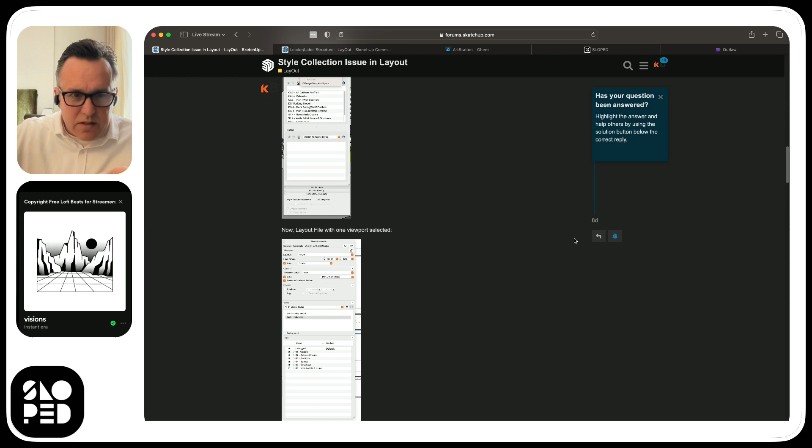I had an issue, an interesting thing I wanted to make clear. This is for Mac users—I don't believe it's on PC as well, but let's take a look. Let me explain it real quick.

You have the ability in SketchUp to set custom locations for these types of assets. Most people might have a custom location for styles, materials, components, and maybe texture images. It's kind of fun to have those in another location if you're managing big libraries, instead of diving down deep into the system files where these are located. So they give you the option in SketchUp to set these.

For me, I had a problem because when you set that, you can see your custom folder in SketchUp, but when you go to Layout on the Mac, you cannot see that custom location for some reason. It took a lot of research and discovery, and we thought it might be because the folder location was on iCloud, but that didn't turn out to be true. I had to ask some more questions. Colin came in.

He said this: I haven't found an answer yet. Layout doesn't have a preference setting for saying where styles are. Otherwise, you could have pointed that to your custom folder location.

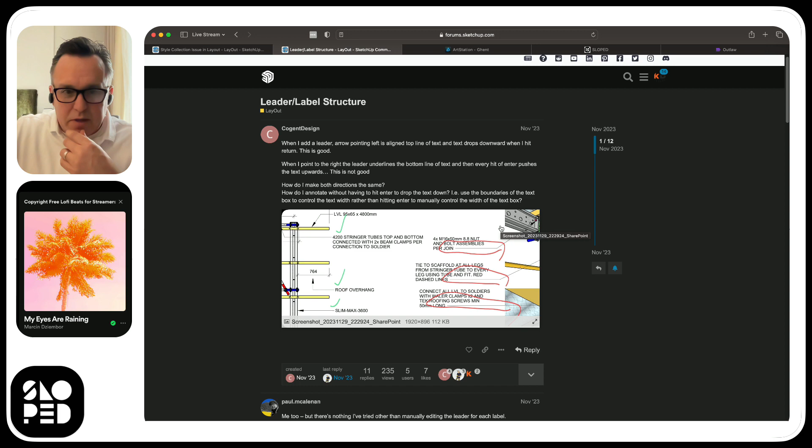This came up the last time I streamed, about a month ago, and we talked about this little thing in layout with the way the leader lines justify depending on which direction you take the arrow. And this is the little box, and I thought that Paul had actually put these dots in here, but he did not. These are default dots that are available, so let's see if I can get this.

We're going to go to SketchUp and Layout, and go to this elevation, and I'll show you. So this is the leader tool. If I go up and to the right, and then I type a bunch of... okay, get rid of that, and now we will...

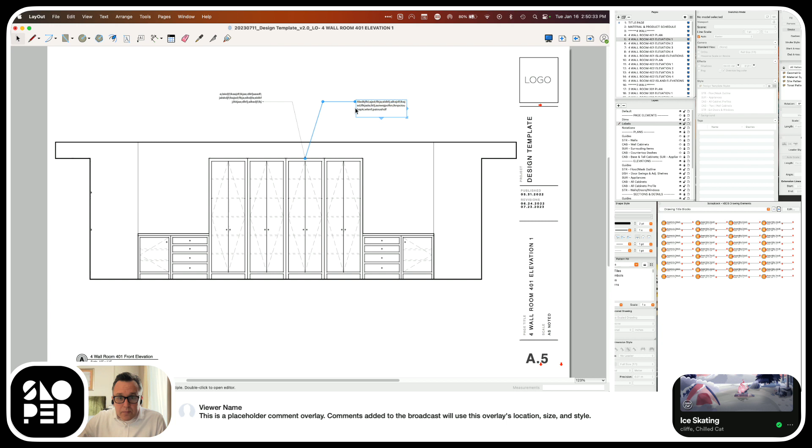So we go up to text, and let's go to align, and we want to go left. So now it's left justified. And if we go to - we can't do anchor, but we can do something different. Let's look at this, and then let's look at this. Oh, that's not the one. Let's come in here a little bit further. Edit label - it gives me auto text definition, but it's still...

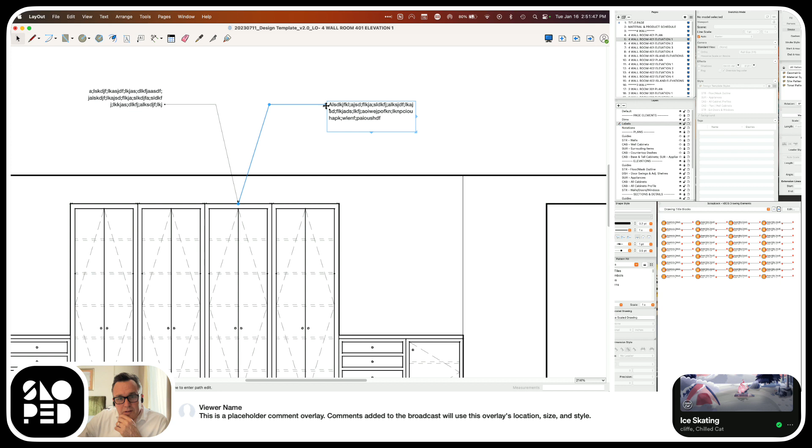Oh, did you see it show up there? There we go, see, now you see it. So all I'm doing - you can see that a little black dot shows up right under the crosshair, and now if I click on it, I have that endpoint connected. So we have yellow, which is end of text, and this is the point that's the same over here. So those are the two default end of text points.

But then you can connect it, and you can connect it to these green ones too. So if we did this, and you did it like that, now you've got something that's looking...

I'm going to break Layout - watch this. It's going to crash. Maybe not.

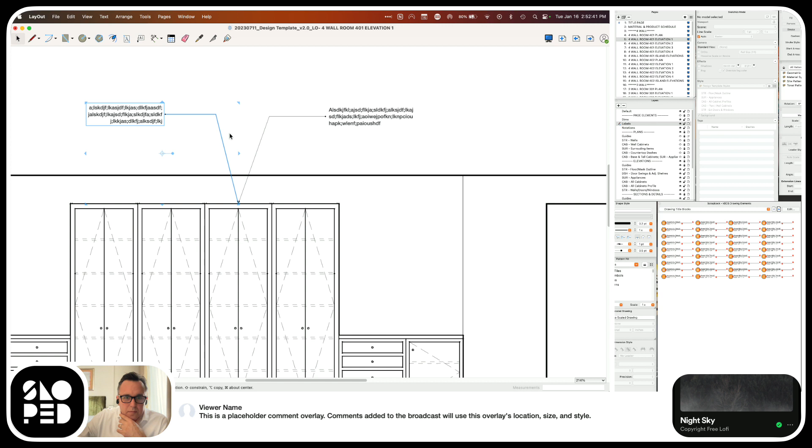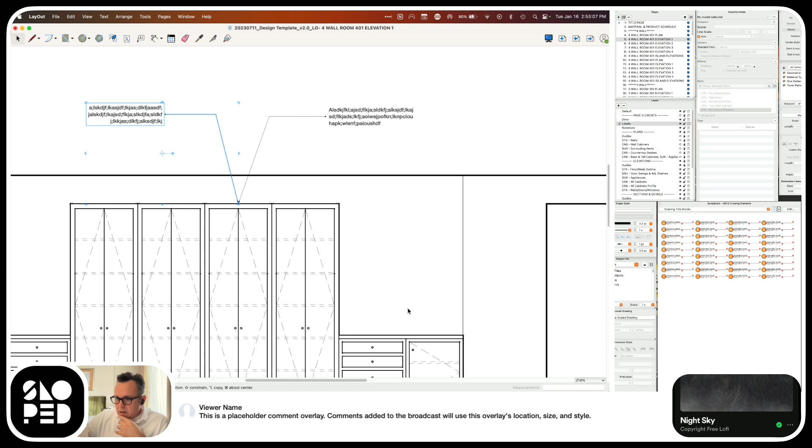So I wanted to correct myself because I had thought that Paul, in his little discussion there, had drawn these in, and he had not. These are nodes for connections. This is the best you can do - it's not a great answer. It'd be great if there was another yellow one here and a yellow one there, so you could determine which location. But I think some of this is drafting background, and one of the individuals - this one right here - at least I remember a CAD tech teaching me something like that a long time ago.

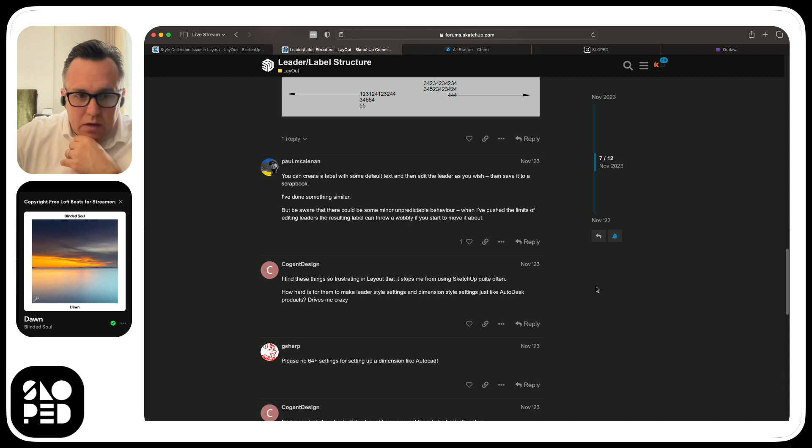Multi-line leaders justify to that standard - standard for how things work in the industry, apparently. I learned drafting in the late 80s and early 90s. Yeah, I'm old. I don't ever remember being taught that, but anyway, I wanted to correct it.

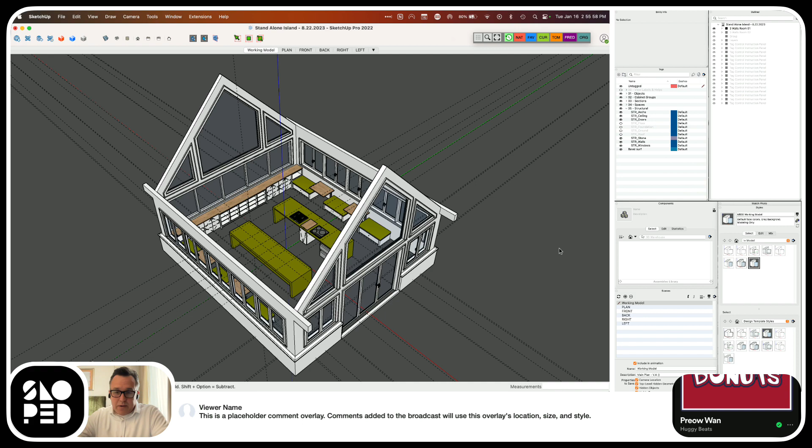So, with that said, we are going to move to Sketchup. And this is the stuff we've been playing around with for a while now, I think I started it back in August, so it's been quite a while. I've taken the roof off this time, and just to turn the clock on, so you can see where we are. I've got a bunch of guides set up this time because I want to try and finish this up today.

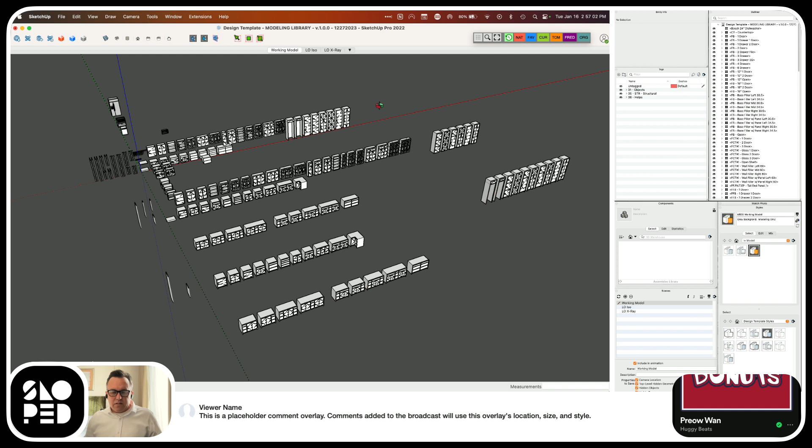Cabinets. I am going to open my model library. I am in the process of tidying up final effort on a cabinet millwork design template for SketchUp and layout. If you are in that segment, or if you're in interior design and you do single rooms, or you're not in the habit of doing large floor remodels, but individual rooms—a bathroom and a kitchen consistently, or a closet—this template might be perfect for you. It automates, quote unquote. This is not a plug-in, so there's some manual effort that has to be put in, but in essence, it creates the drawings in layout basically on an automatic level.

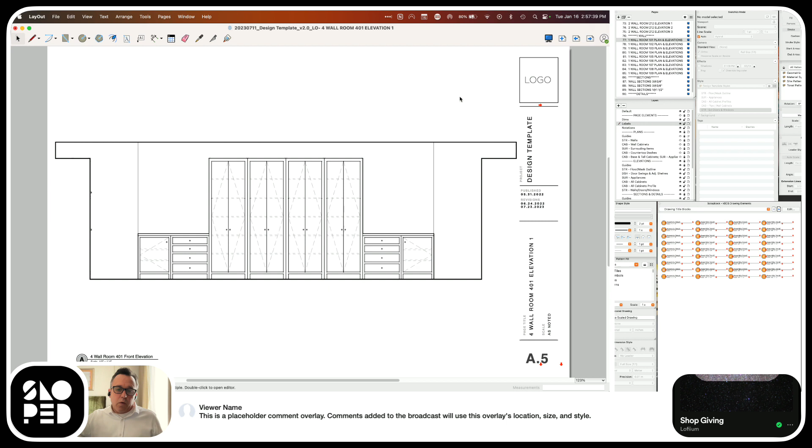So this here is what a typical elevation in this template would look like. I can go down and show a single wall room, which is a little better. This is what a standard one elevation kitchen might look like, or an apartment, something like that. The only thing that's not automatic is dimensions and notes. Everything else is taken care of. You would probably have to retitle here and then retitle your page title, but those get titled. I hope you can see this on the screen here.

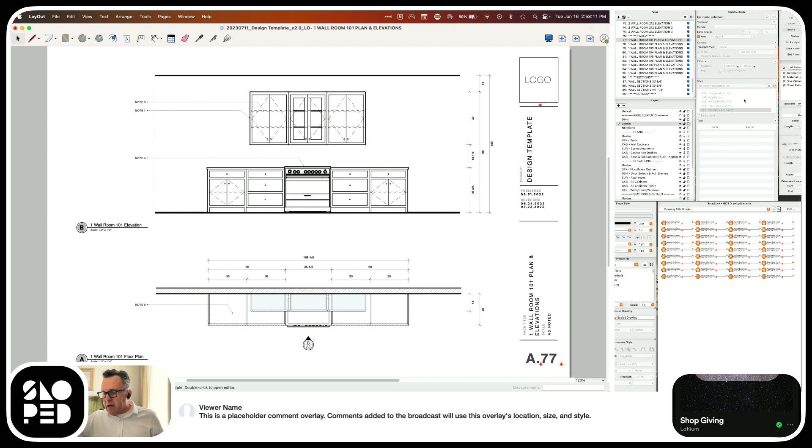I've got the screen divided up so you can now see my second monitor and how I have these laid out. It's kind of two boxes on top of each other, but on my screen they're all side by side. This scrapbook window is on the far right of my screen. So hopefully this helps you see some of the things I'm doing when I go off to my right side. If you know anything about layout, all you have to do is rename this title. It will auto text this and change that title to match the page number, page name. Then you might have to change your callouts, but you've minimized quite a bit how this works, and we're all about this template.

Stack viewports, you can see some of those right here. These are the stack viewports. The way the system works is the layers in layout match tags and styles. So if we were to click on any one, now I've got one viewport open, and now you can see that the styles here have similar names. So STR floor mask outline is the same as STR floor mask outline. So if I have a viewport and I do have a viewport layer, I assign it the same style, and it's going to help produce this really nice, traditional looking line work for drawings, which doesn't happen very often for black and white drawings in SketchUp and Layout. It's hard to achieve because you have to play around a lot with viewports, and that's not always easy.

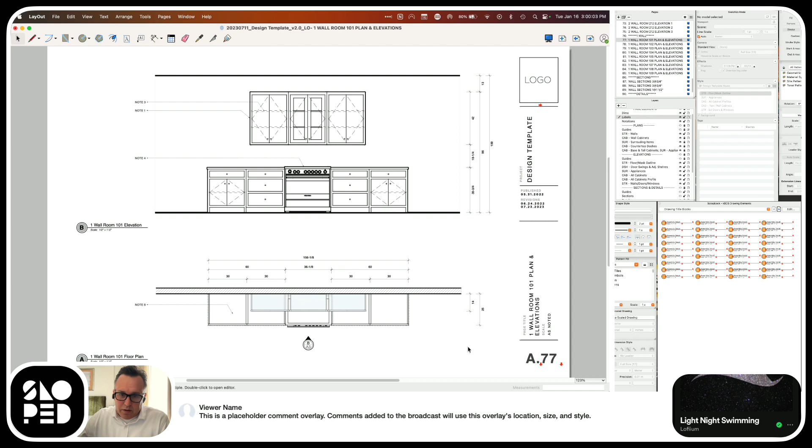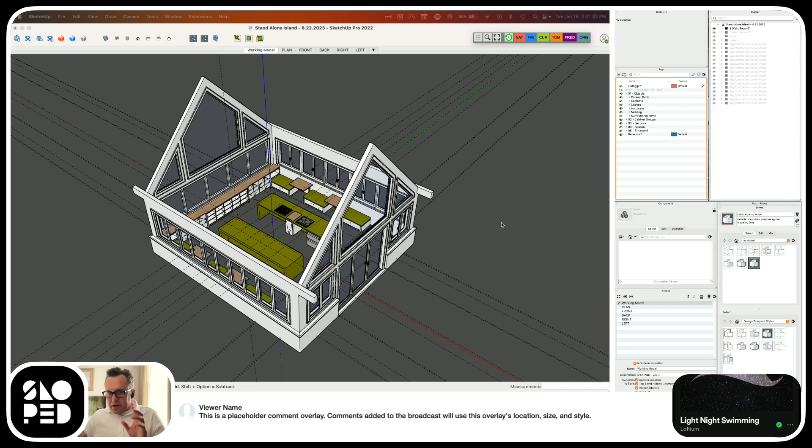That's the kind of general gist of what you're going to be seeing me do here. We're just trying to get this finished so then I can put it over to layout and you can watch this little room become a set of drawings, and hopefully this is going to help you understand the power of the SketchUp and Layout workflow.

With Sloped, we are committed to what we call layout ready modeling, approaching the model not just from the model's point of view, but as a tool to build your drawings. Most people model first and then try to shove it into layout to get drawings. You have to think about the end product, but if you're going to use SketchUp and Layout correctly, it's best to think about the drawing first, since that's the thing that actually gets the unit built. Then you backtrack to the model and build it correctly. The render will always work better when you've laid your model out for layout.

Those that do any kind of work in rendering software know the value of good tags, objects that have been turned into groups or components. These things all help with assigning textures, and so a well-organized model is important.

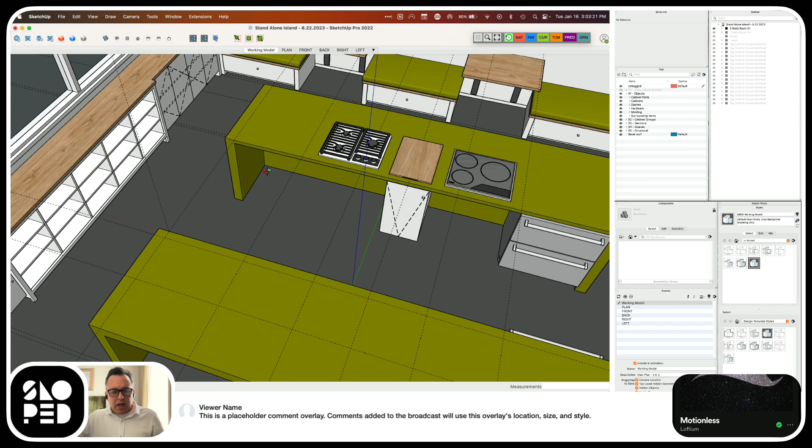I've already established that I want to have another appliance here, and then we're going to do some cabinets in these locations. We have to add a sink base here and a dishwasher here, and on this side we're going to have a sink cabinet, and then this is just going to be drawers, and this is going to be drawers, dishwasher, and drawer.

So we're going to bring in some of this. We're going to do all Euro style. I'm going to use this one and this one. I don't think I want any pullouts this time because at this point...

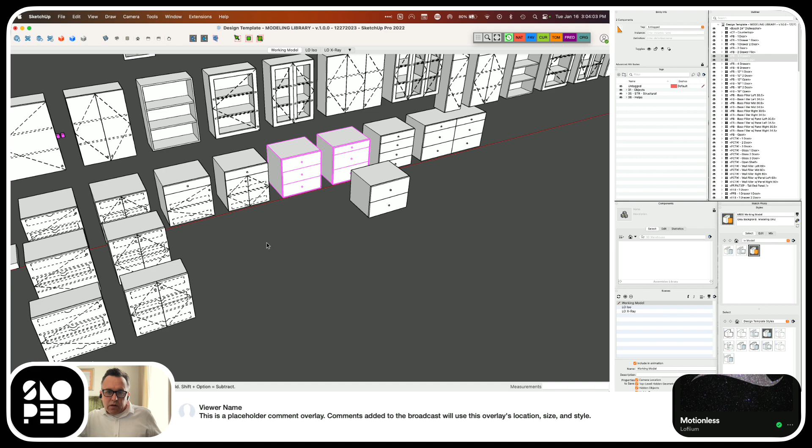And a sink cabinet, I think that's got a sink cabinet. So we're going to do copy, and then we're going to go back, and we're going to place these down with Command V on the Mac, which allows me to place them. I could also use Control V, which would be paste in place, but that's not the point.

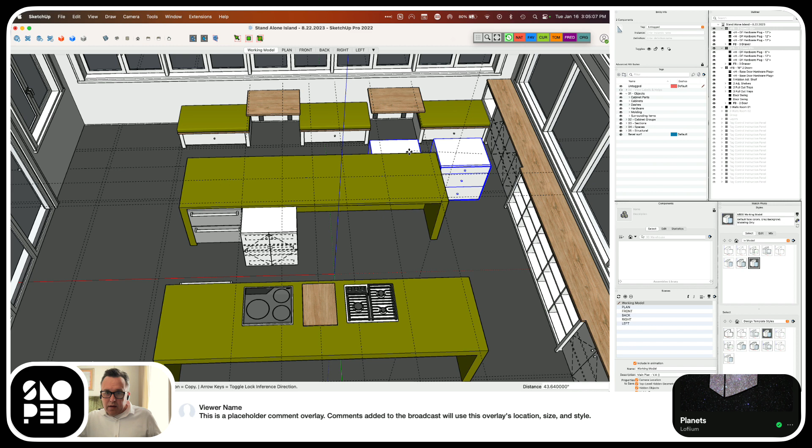Unselect that guy and move here. Actually, I want to do it this way.

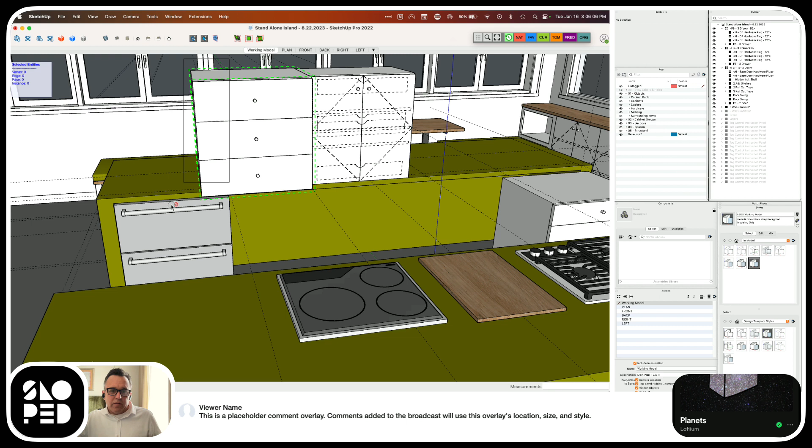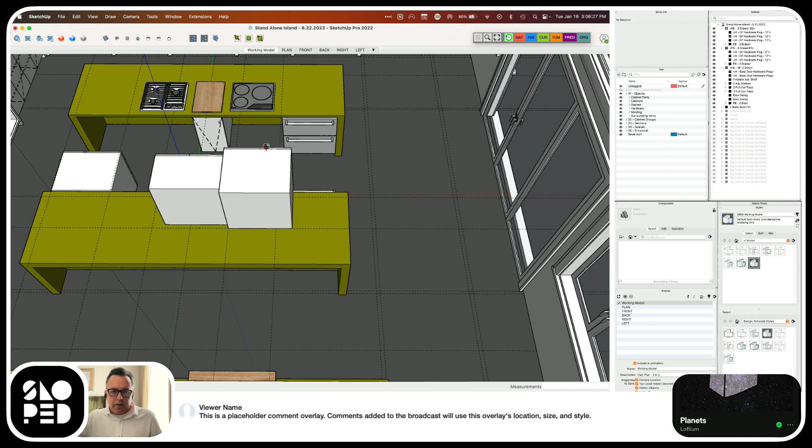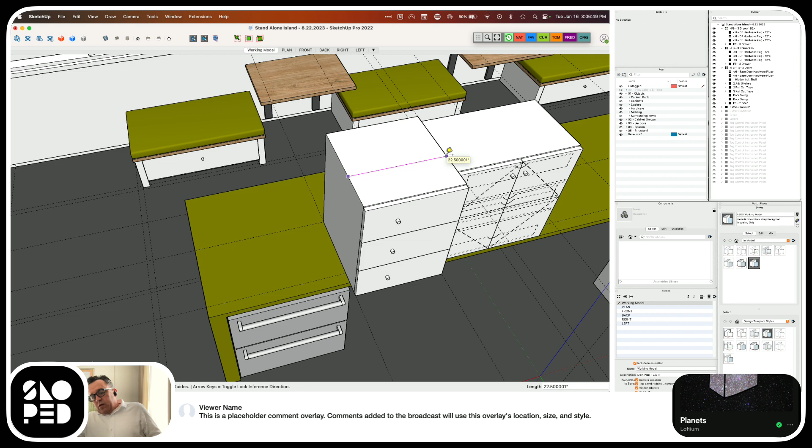Got a little middle of the wall there. Let's try it this way instead. Stretch that there. This is why I put this up here, because I know that was 30, so I brought it down 7.5 inches.

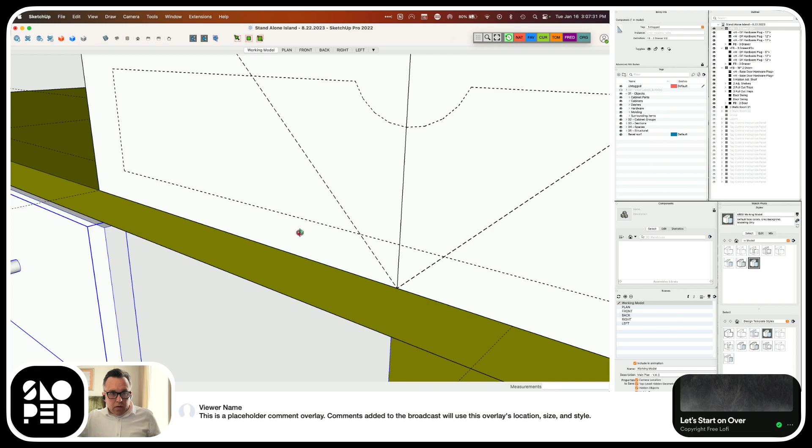What's half of 7.5, ladies and gentlemen? Anybody know? 3.75, I believe that's it. Math is our friend. Okay, and we're gonna move this one down. Yeah, so we're good to go there.

Now maybe you're wondering, hey Keith, where's the toe kick? Okay, then we're gonna move out to here, and this one. That's a 6-inch section, so we are going...

This one, leave that one. If I can get into it, there we go. Get rid of the shelf, we're going to get rid of that shelf. And then we're going to get out of this and pick that again.

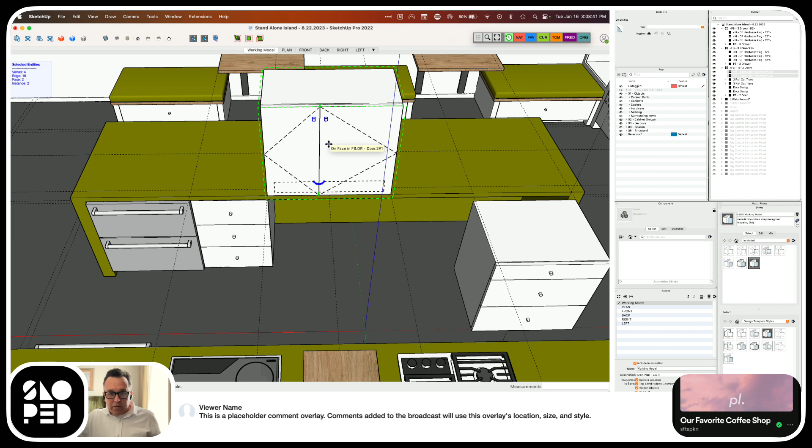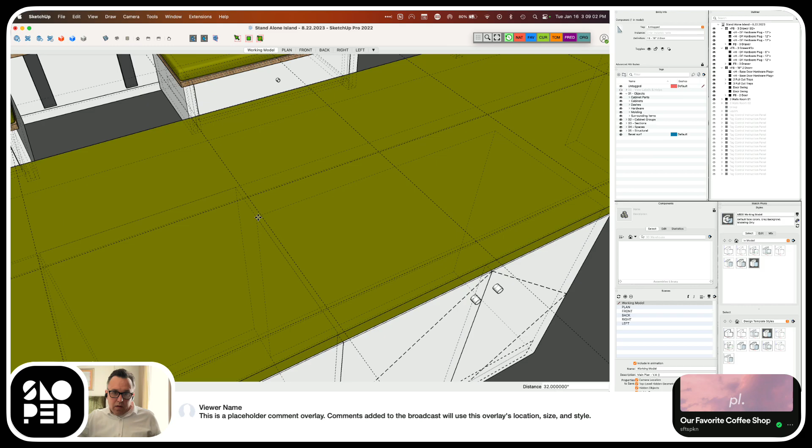Interesting, I wonder how that one became 19. Because I did something wrong, pulled the wrong one out. So we're gonna do that. Probably, if I look at my entity info, it's an 18-inch 2-door. I picked the wrong one, oh well. We're gonna do that.

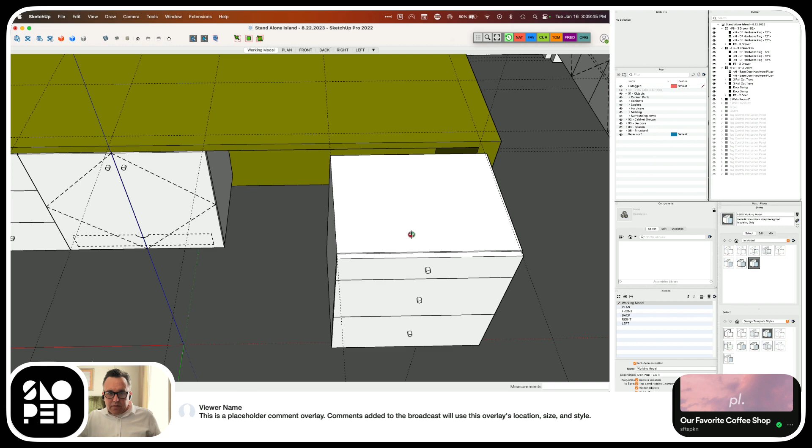Okay, let's see, pull this guy up. That, and we need him to lose some weight. 1... and it knows what half of 1 is.

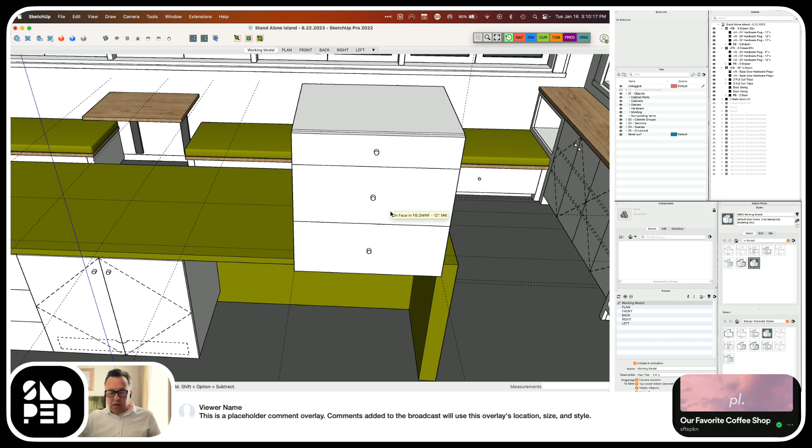Don't worry too much about that. Actually, I don't need to go into it, I can just click this and then do that and go 0.5. Pardon me, I was about to sneeze. 30.5, so we want to go 32, and now we know it's down at the bottom. There.

Okay, now a dishwasher gets to go in here, right? Makes sense, does everybody? Not stellar amazing design, but stellar amazing.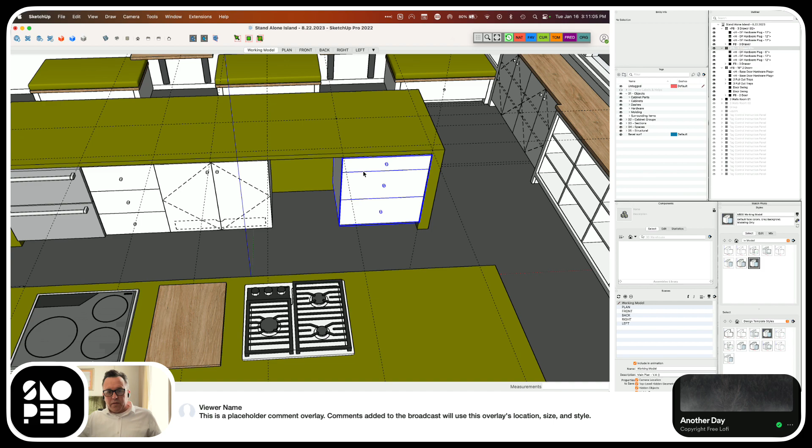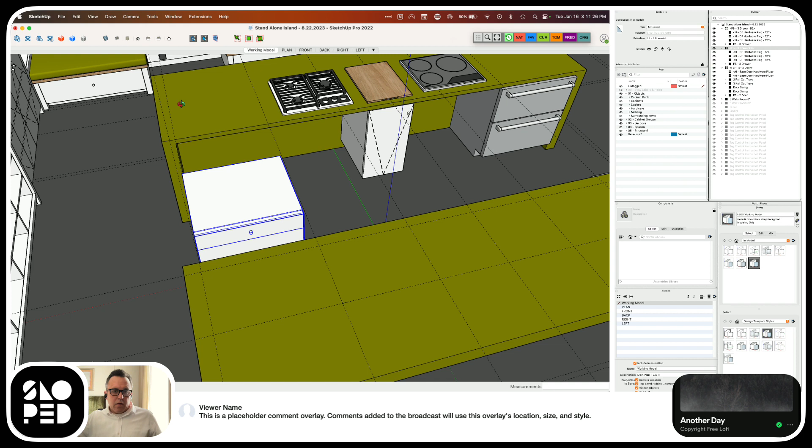Let's see, I want 3 drawers. Yeah, I think I do. So the drawers don't have problems. Let's bring it. What we got here? Oh, it's the same. Yeah.

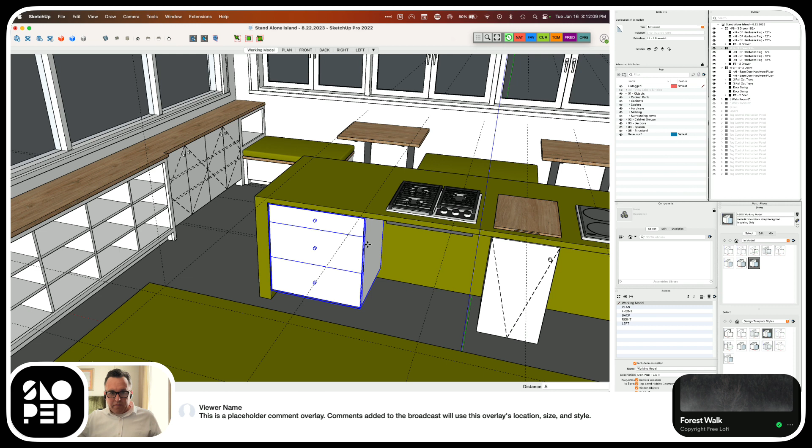Now I can tell I'm wrong here because I don't have any gap for my drawers, so not a good sign. All I want to move... I'm going to take it over 0.5. Oh, do that.

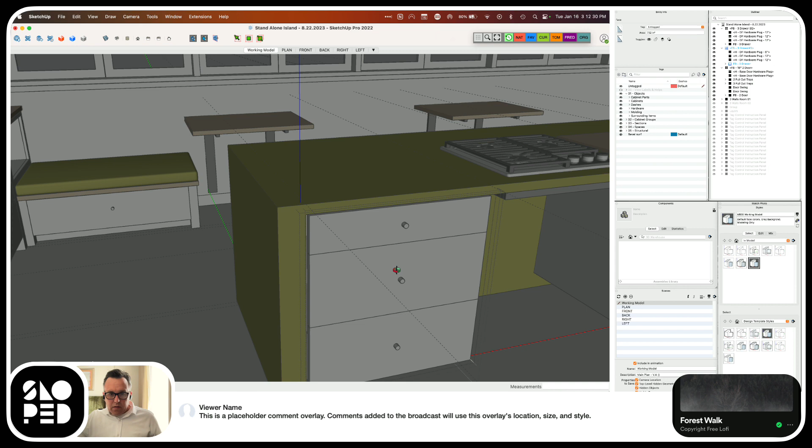Now, if I want to cheat this, this would be the way to do it. Instead of putting a full spacer in there, I'm going to do that. In some ways, that's how you handle it. Nice.

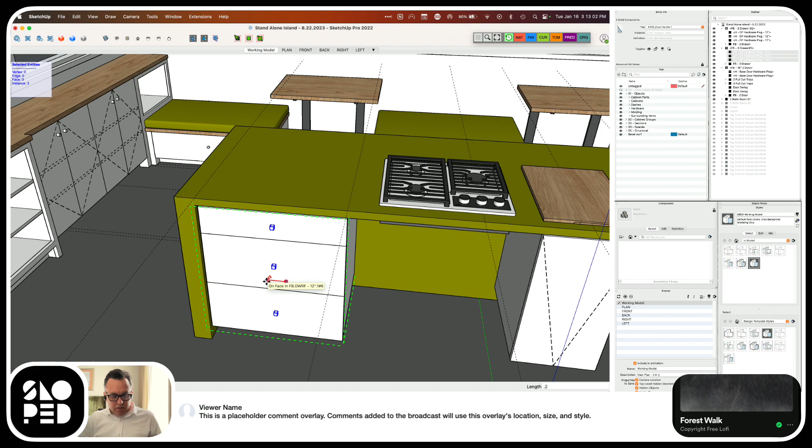This one needs to go now back a half inch. 0.5. Click it again and select hardware, and that's going to go back 0.25. Okay, so now we should have equal space here, I think. We'll see.

And I'm going to take this guy and make a copy, and take him over here. We're going to move him 0.5, but we got to also make him unique because he's the same as that.

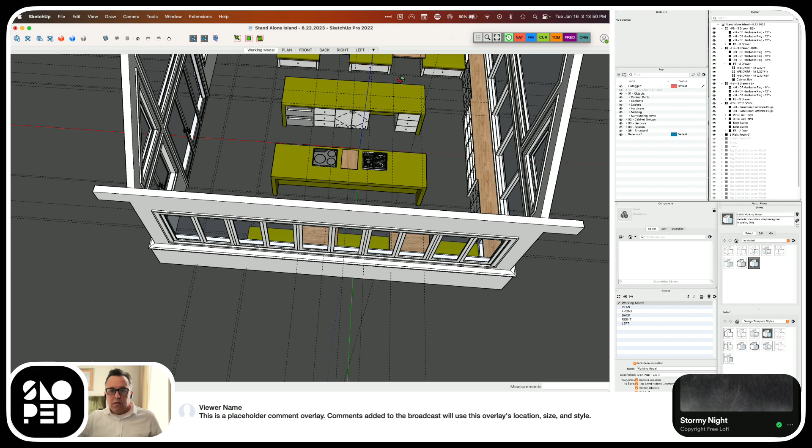Add the... okay. Oh, I'm in the wall again. Okay, so it looks good.

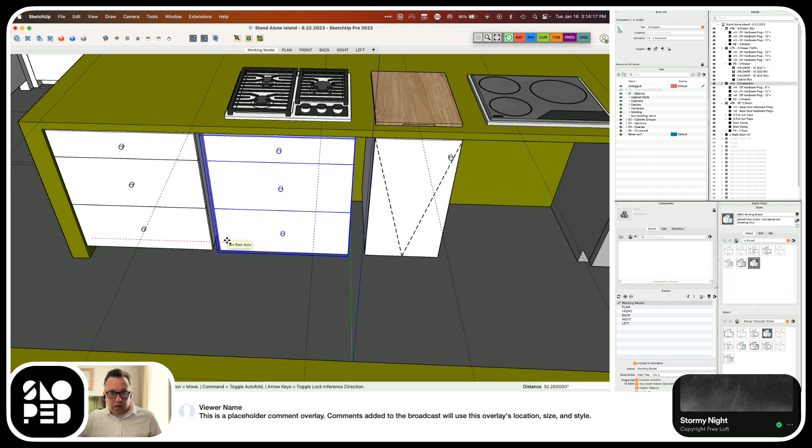Alright, and then here, yeah, I was gonna do all drawers. I'm just a fan of drawers instead of cabinets - deep cabinets that lose stuff. And I understand you can do pull-outs and those kinds of things, so that's it.

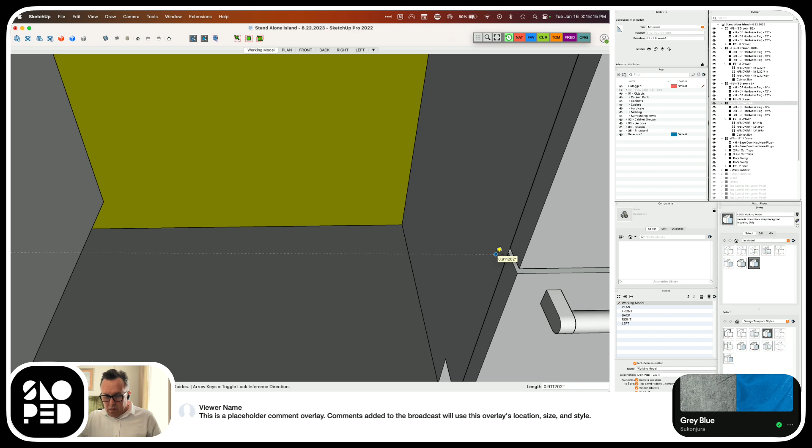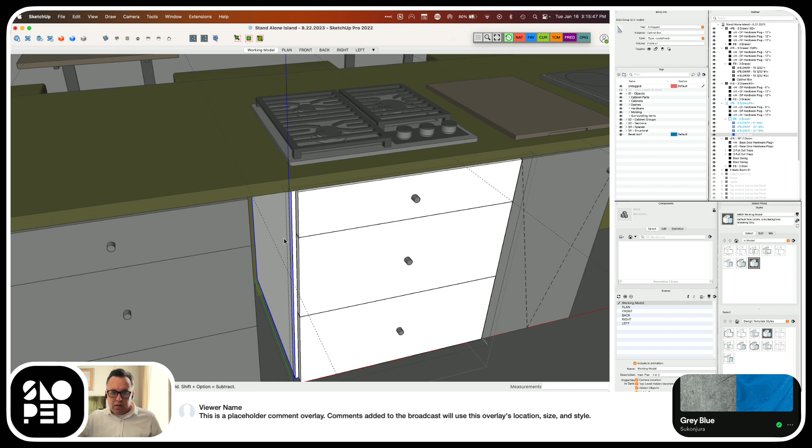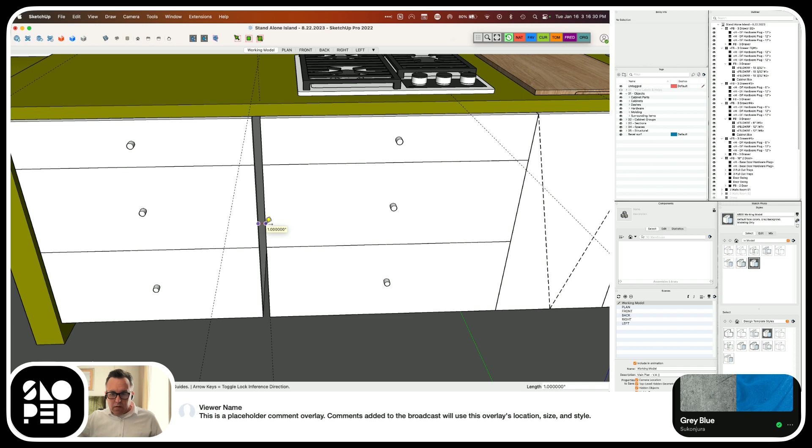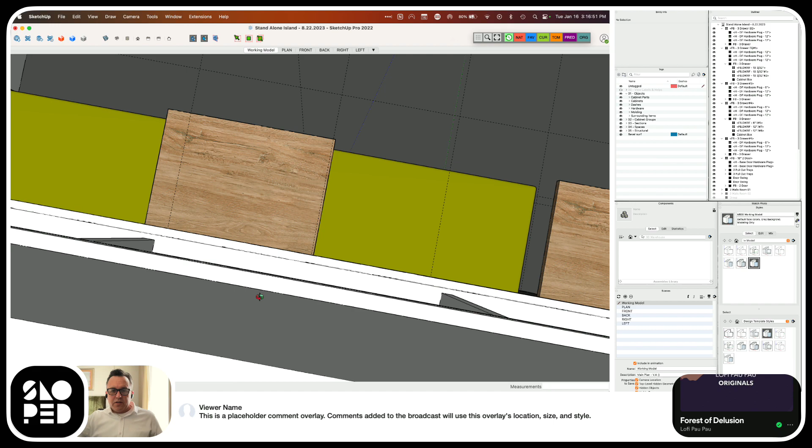Okay, so you see just here, you can kind of see what having the pre-modeled units allows you to do. You can very quickly hammer out a design. We're in the process of doing quite a bit of work on libraries and building up a place. That's why I love this.

Yeah, I should have picked this one. Anyway, we've got a few little guys here. They're nothing really. We're going to build out a whole appliance library where the appliances will be laid out just like this, and you'll be able to go in and click on any one of these you need. All it is, you just highlight it and you'll be able to see it's a Fisher Paykel 36-inch induction range, and it's this number.

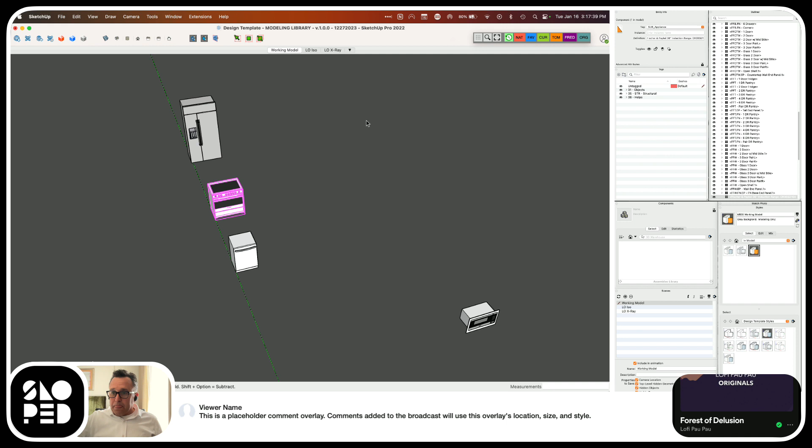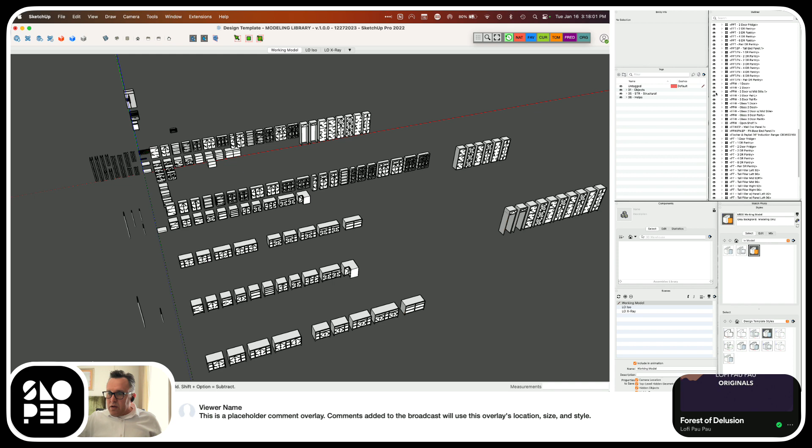Oh, okay, great. You'll be able to see it also in this library. So you have a Base 24. If we have this cabinet library open, I can look down through my outliner and see all the different types of cabinets. If I also have a similar one, and then refrigerators are all grouped, so you have a group folder up here and it's all refrigerators - you can go in and see all the different model numbers.

Highlight that one, because watch what happens when I click this one. There we go, that is highlighted now. And the one drawer - there, it's highlighted. Oh, I need a 2-drawer file. Oh, there's the 2-drawer file. I need a 3-drawer equal, all drawer fronts equal. Okay, that's that one there.

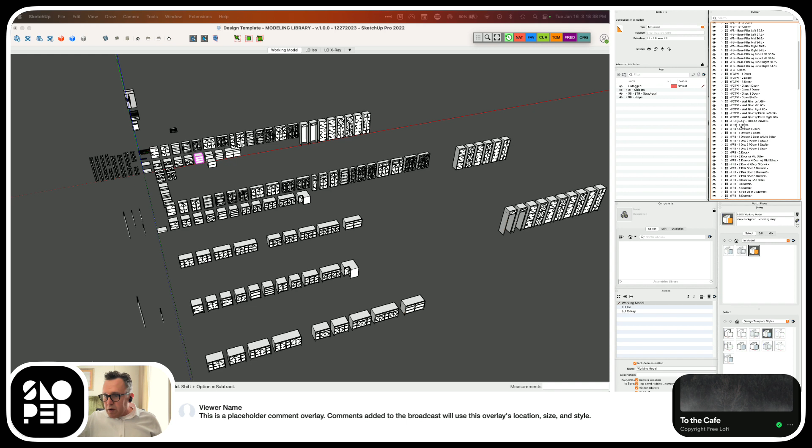I need a, what is this? Face frame base 1-door. Oh, there it is. Face frame base, finished floor - FN means finished, which means it's got these feet. So we got this amazing little thing.

So we're going to have this template. If you already know what you're working with, you know the appliances you're going for, and you just have them at your disposal, then it's just - I need that, I switch over here, I find it, I put it in. And it's just quick. You're not going to 3D warehouse, you're not going over here trying to look through the whole thing. It's just very fast. To me, it's become much faster than having a component library, because I don't have to search through - I can visually see it and also look for titles when I'm in this.

And that's what I think I struggle a little bit with the component library window here - you're getting a list or you're getting a view and you're not totally sure. I like to see it all. That's me. It might be inefficient at this point, but hoping that we'll be able to come up with some way to speed it up as we get releases done. And that's what we're working on.

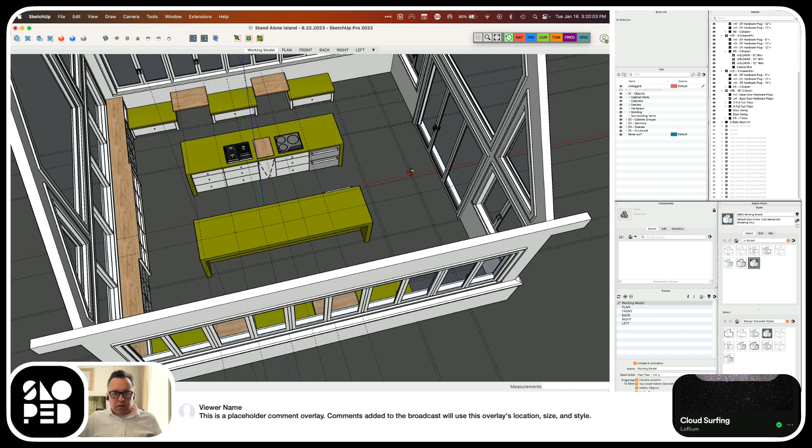So we got that done and that done. Then we needed to do what I'm doing here. So this is kind of a trash cutting board. Get rid of all these.

That's 33. So, 16 and a half. That's center. Looks like I've already got it centered on the opening, like that.

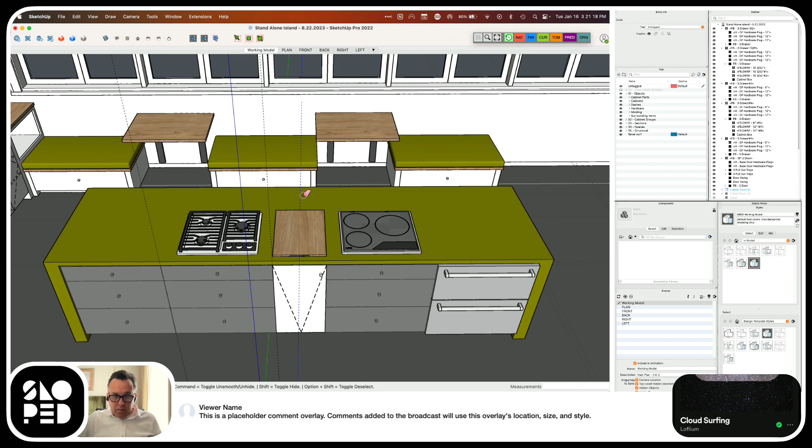So there we go. I wonder if I have a dishwasher somewhere. This is where it is. Yes, it is. Scope docs. Oh, you know what? I never did get a dishwasher.

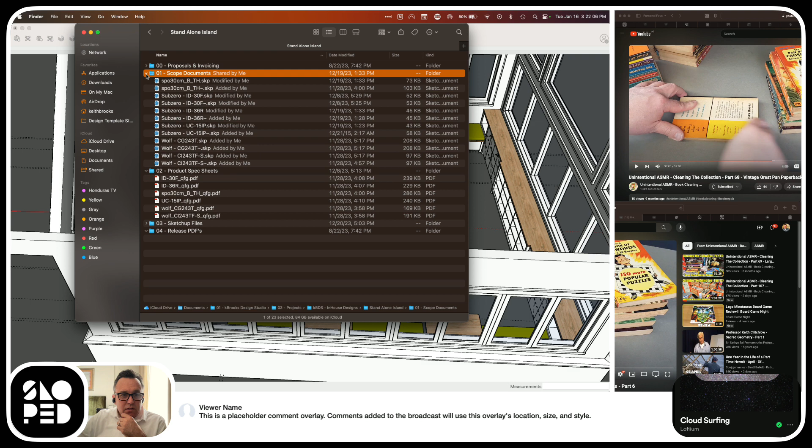Well, I guess what I'll do is this time I'm gonna use this little guy here, Bosch 24-inch. So we're gonna stick it. 23.5, which means that we've got a 1/4 inch spare on both sides.

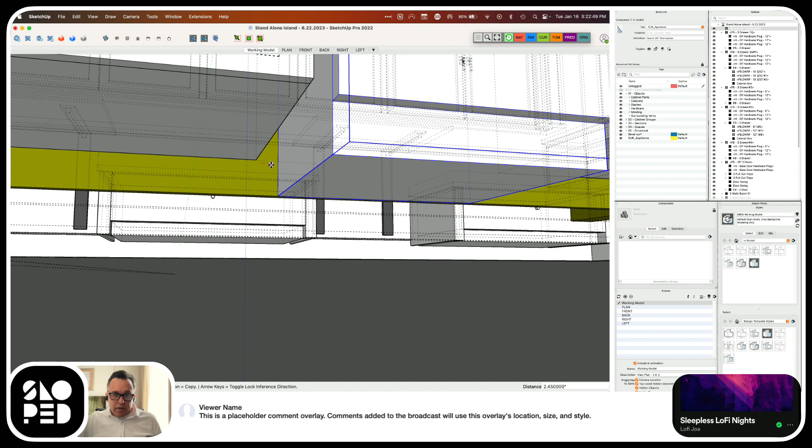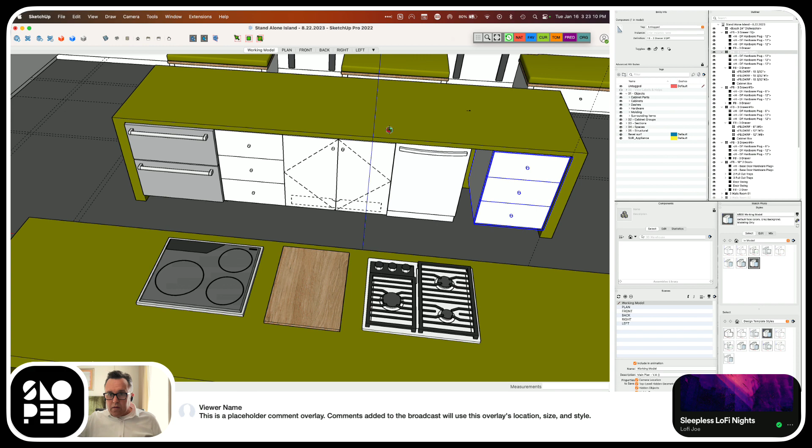That's what I'm doing. So we need to move this one. It's unique, so do 6 inches. And 3. And there we go.

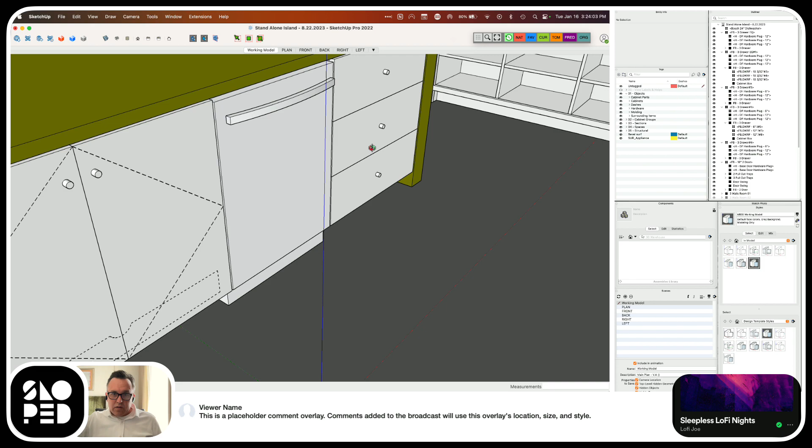There we go. Now let's bring this out. I don't know what that's. 2.5. 2.5 flush. Yeah. Okay.

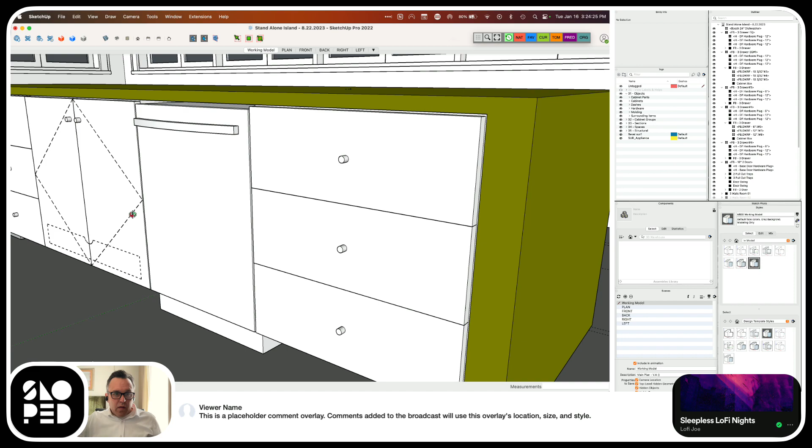All right. Everybody happy? All right. But I like, generally speaking, what I see. I'm gonna go get a toe kick. Come back here. And I'm gonna hit that. I want to, as much as possible.

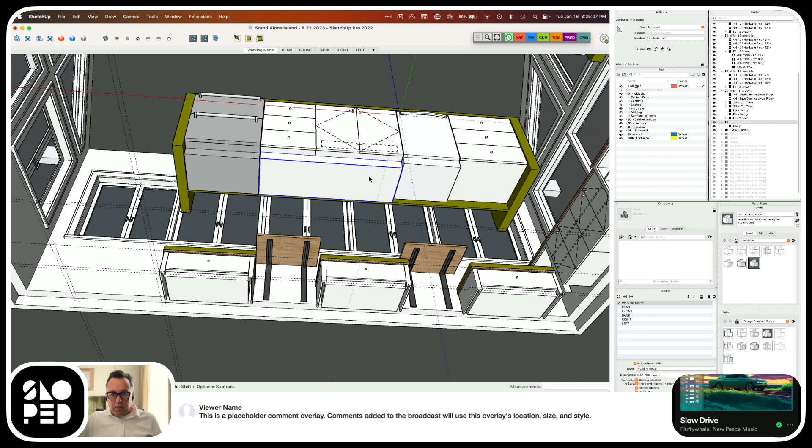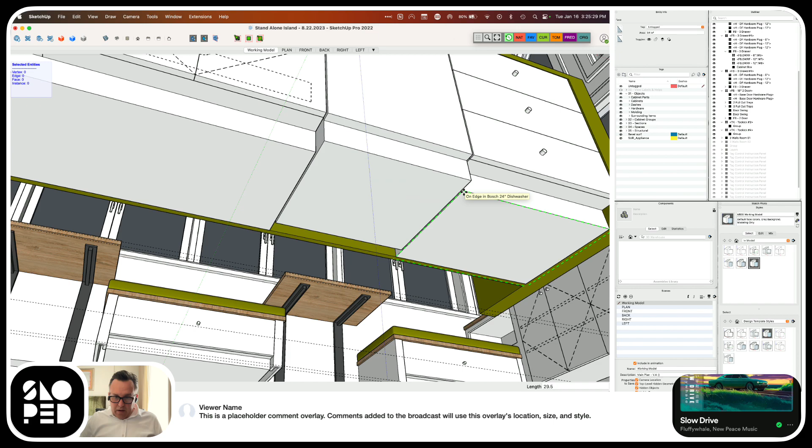And 29.5. And that. And we're going to bring in this.

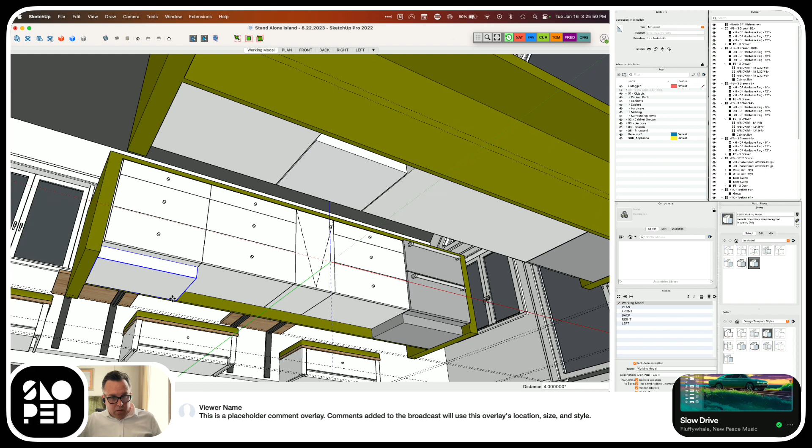Correct stretch again. Again, I cannot reiterate how big a deal Correct Stretch is. I wish this was a native tool inside of SketchUp. I think it's one of the most profound plugins that exists in the SketchUp universe. That's me speaking, not them.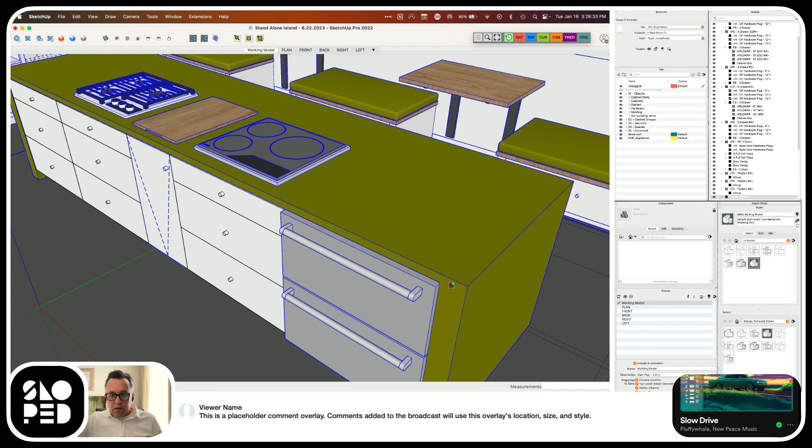Did I make a mistake? I did. This needed to be 0.5.

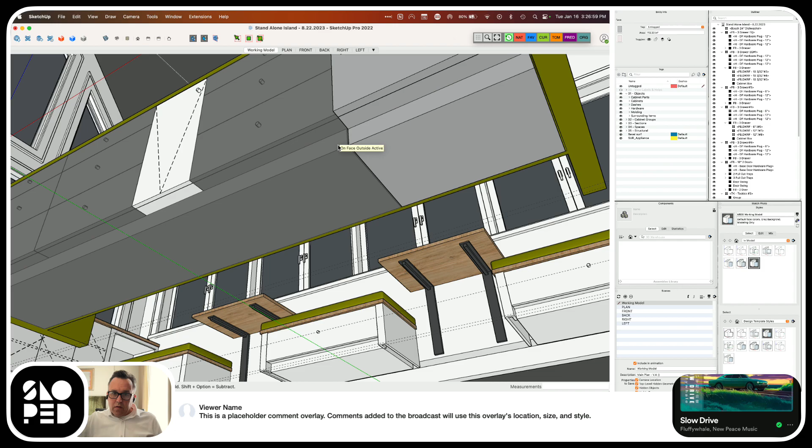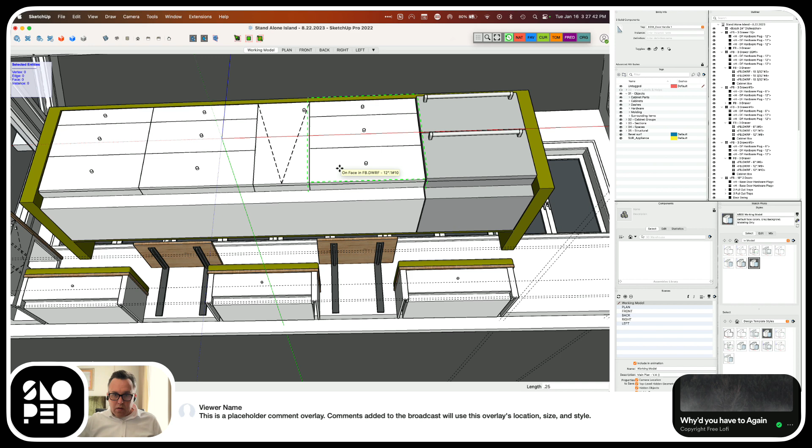Yeah, bummer. Okay, so we've got to make this one move. Move a 1/4 inch. And now this is 32.5. It's 33, so we got the same thing.

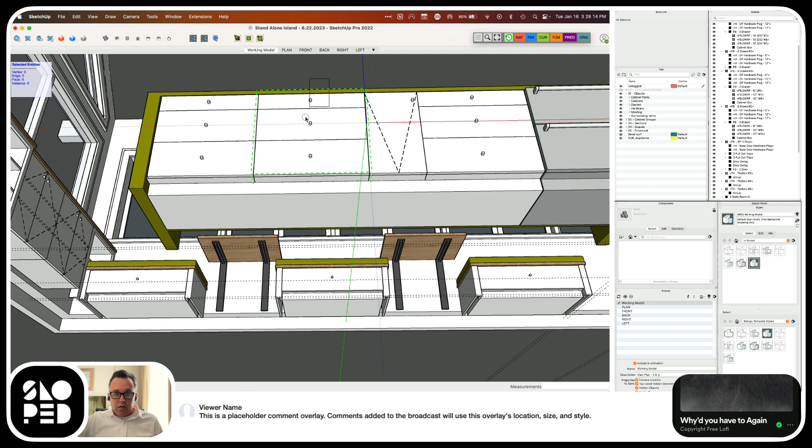This. Got plenty of stuff here. Cooking, refrigeration with a freezer, refrigeration with a freezer, dishwasher, 2 cooktops. The only thing I don't have is a microwave and an oven system, and I've been debating about putting those.

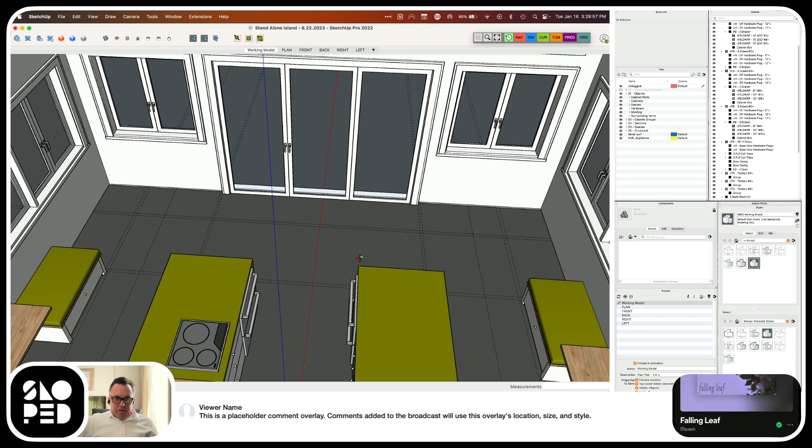This is why I was thinking out loud. I think I'd like to put those here. It's a little odd, but this whole kitchen's odd. It's just playing around with an idea, so I think I can get away with it just because it's not built by anybody. But maybe it'll have an influence on somebody.

Yeah, and I might do this as a little bit of a longer stream today. Maybe next week I think I'll finish it. Let's go back.

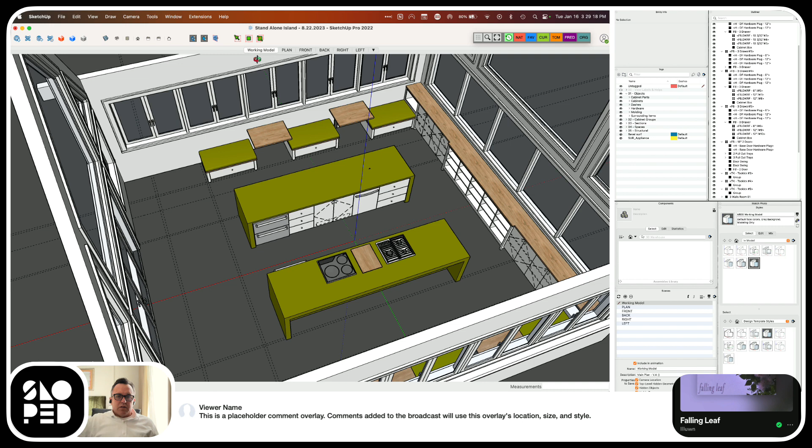That, like next week we'll kind of pick a color, kind of leaning towards a particular direction with the cabinets as far as colors go, and yeah, that'll be one of the things that we'll kind of enjoy. I'm gonna bump this structural out of here.

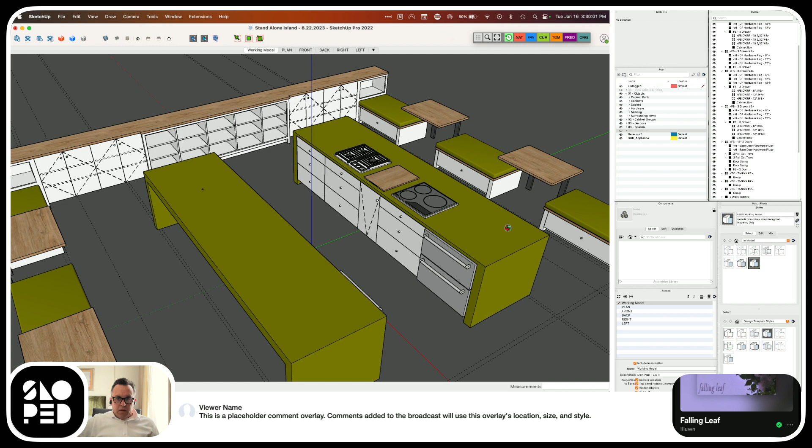I think I'm gonna pick some hardware so that we have that chosen. Custom bar for the dishwasher, and finish up these corners here, and then we'll do a little bit of work, I think.

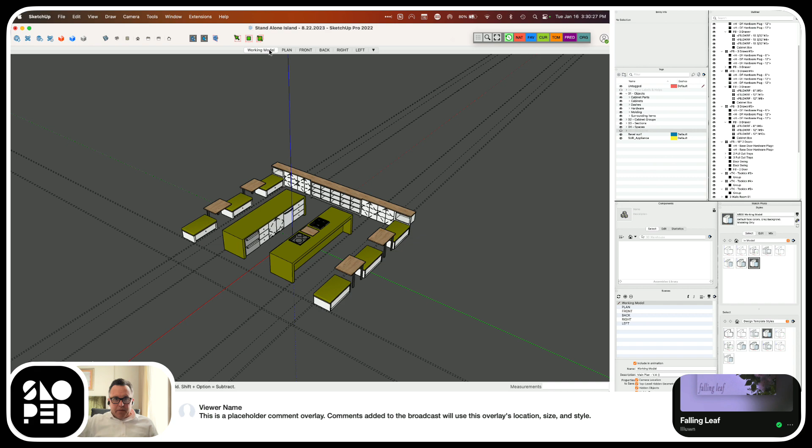Yeah, so we'll need to do a little work. After that, I think I probably could go to drawings, just show that part, and then we'll do a little bit of decoration to kind of give it some life, put some stuff on the tables. Again, kind of close this out in some ways.